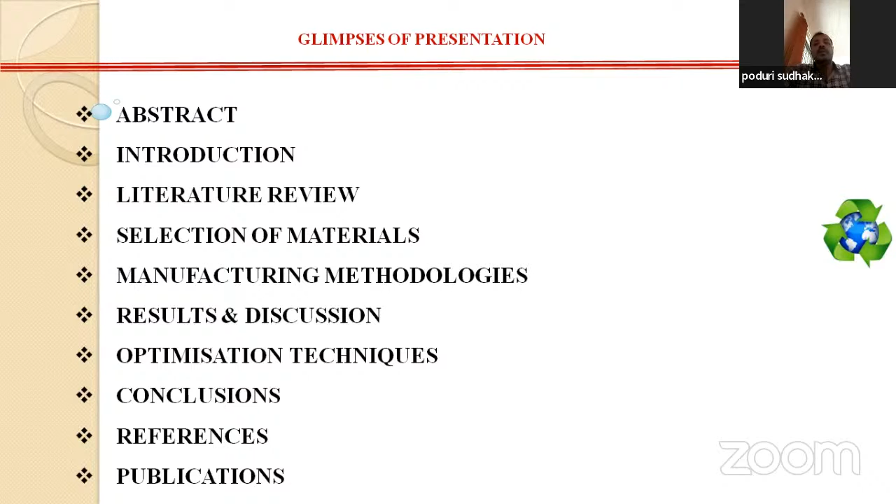So, coming to functionally graded materials: these are an advanced engineering material that is able to survive in very extensive working conditions, whether high temperature, low temperature, a combination or cyclic temperature, or fatigue stress or cyclic stresses. Without change in the metal properties despite n number of stresses and n number of strains, it will have a service life. That is why it is an extensive material, applied in aeronautical as well as present ongoing research for automobile applications.

And these are considered to be heterogeneous. Why? Because in the same material we have the base material as one compound and the reinforcement, just like a metal matrix composite. But in the metal matrix composite, you have a uniform dispersion of the materials. So even though metal matrix composites are considered heterogeneous, if you take any point in the product, we will have the same metal properties.

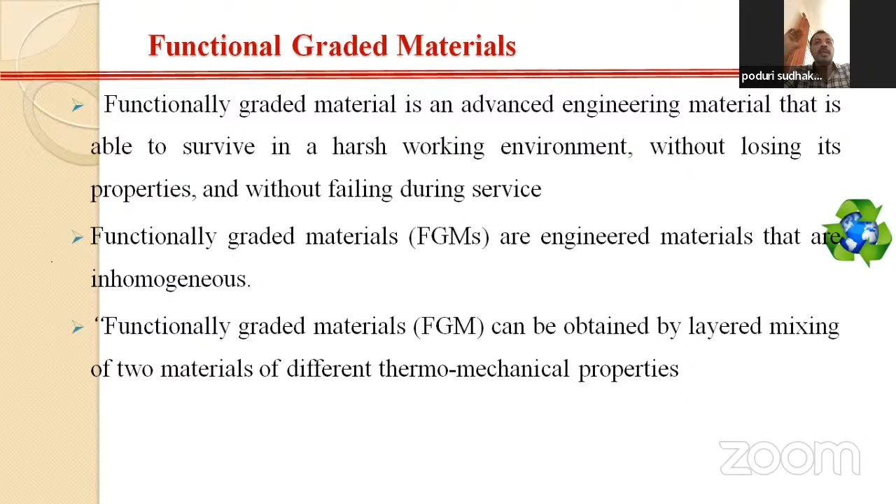But in the functionally graded material, as we proceed from the bottom layer to the top layer, or top layer to bottom layer, there will be a progressive change in the metal properties—either increase or decrease of compression strength, increase or decrease of tensile strength. This means we are able to vary our properties at any point of our metal composition, and that's why these are an advanced material.

So this is not a new metal we are using, it is available in nature. Just like wood, our teeth, and different kinds of muscles, we have these functionally graded materials. But this research has not been done extensively. We are mainly focusing on alloys and composites: metal matrix composites, polymer reinforced composites, glass reinforcement composites, and all other types. But this kind of research is important, where we can have extensive properties.

So why is it called the metallic phase? Basically the matrix metal is treated as the base metal. Metals will take just like aluminum and aluminum alloys, copper alloys, tungsten alloys, vanadium, nickel, carbon, and all kinds of metals we can take in the metallic phase.

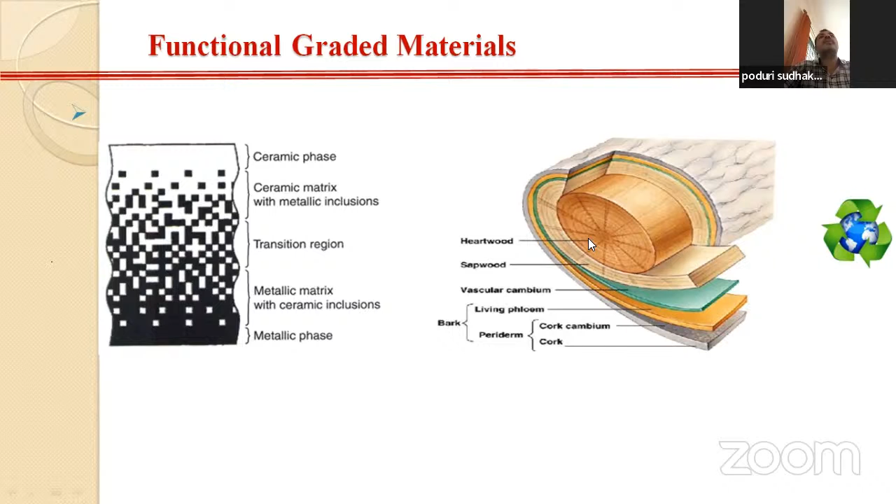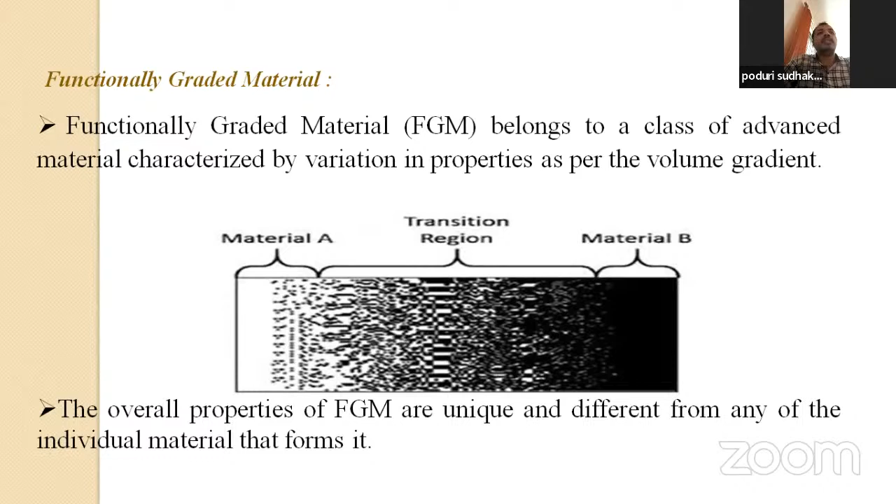Other examples include bones and teeth. If you take the first one, this is the composites. If you take a polymer composite or a metal matrix composite, there will be a uniform distribution of the metal properties. But when you take a functionally graded material, it will have a rise or a lowering of the metal properties as you proceed from bottom to top or top to bottom.

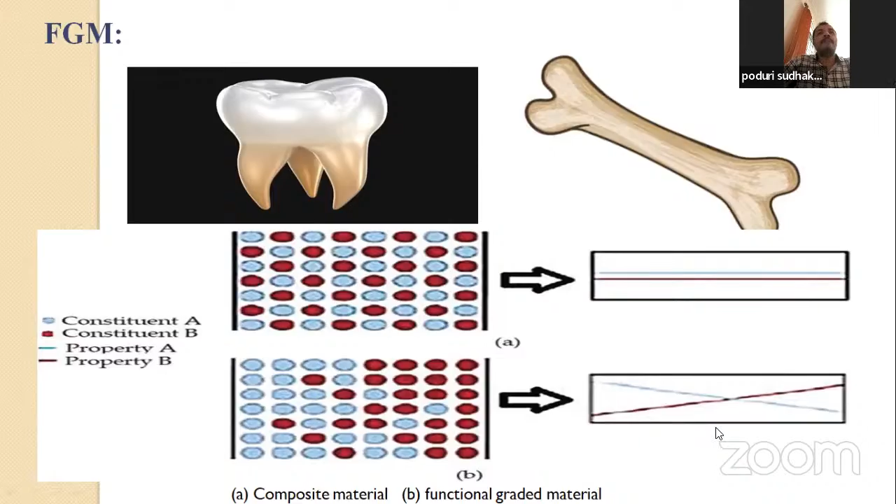From that time on, they have been extensively researching these kinds of products, mainly for the aerospace and aircraft industries, and developed these materials. Later, we are now switching into microprocessors, automobile applications, and domestic applications.

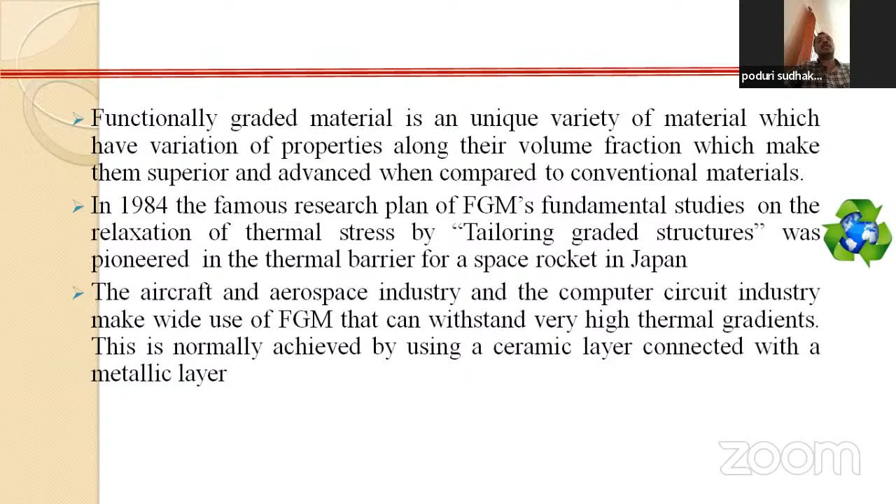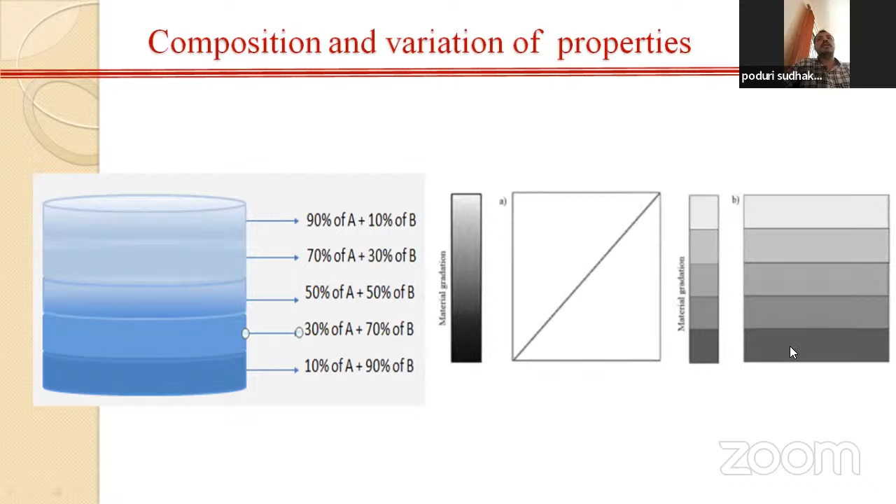This is also in terms of weight proportions. From the bottom, we have 100% of the matrix material, and as we proceed upward, we have 10% reinforcement and 90% matrix material, continuing forward and upward until we have 100% reinforcement. This is the graph showing the material gradation, that is the material composition, and side B, that is the composite material.

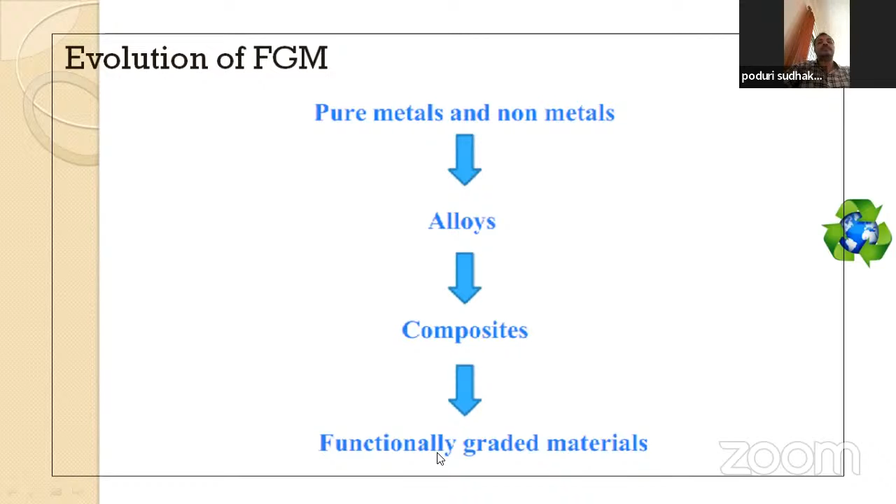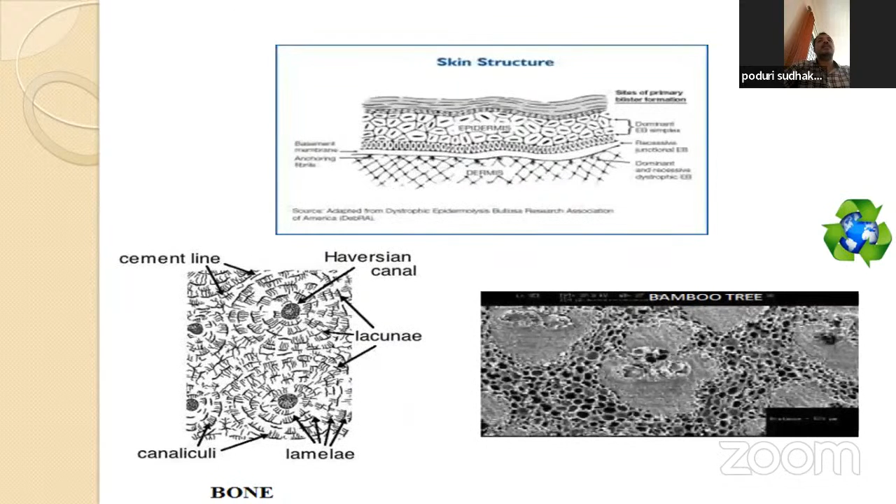So this is the literature review, and I have taken the latest one, 2019. Saleh and Ahmed have done research on functionally graded tubes, of which aluminum is taken as the matrix material and alumina is taken as the reinforcement. They generated these using centrifugal casting for automotive applications. This was published in Metallurgical and Materials International.

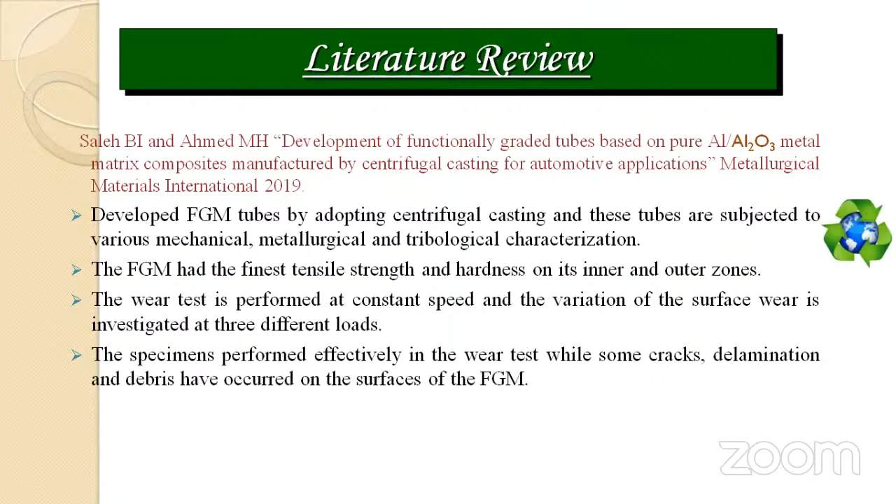Metallurgical and Materials International 2019. And here, why he has chosen centrifugal casting: centrifugal casting is a widely used process in preparation of alloy materials, where we can cast a product by using centrifugal force, and the tubes are produced. He has checked the tensile strength and hardness at the inner and outer zones, and also

found out the wear by using the tribological wear test apparatus, and found the surface wear at three different loads, mainly 5 newtons, 10 newtons, and 15 newtons. Due to the microstructural characterization, he has seen visualization of some cracks, delamination, and some kinds of deformities.

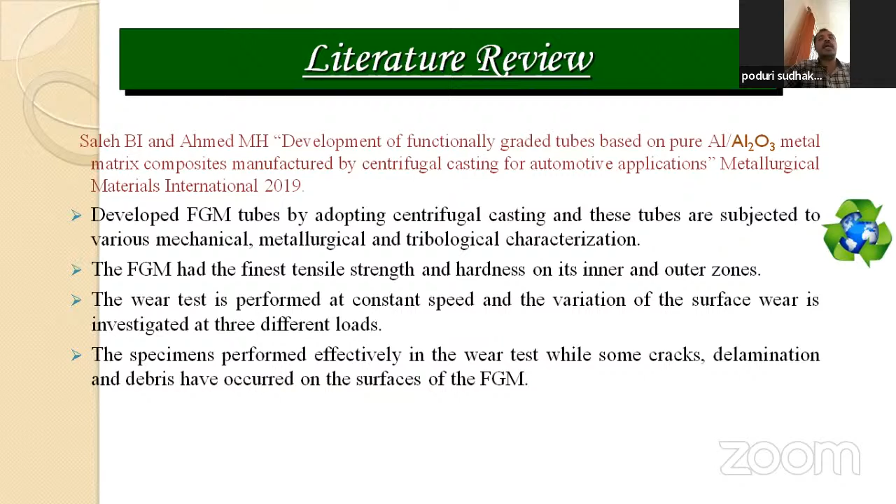But in this research, by taking the centrifugal casting, there should be a gradation of the metal properties. And there is a research gap of how there could be a gradation of the metal properties when we move layer wise, or there is no significant visualization of the matrix and the reinforcement, whether they are bonded together or not, and the gradation of the metal properties is not exclusively discussed. So these are 2 to 3 research gaps found by analyzing this paper.

And similarly, with magnesium modified hypereutectic functionally graded aluminum composites, even though there is a wear analysis, Jayakumar has taken the base metal as A390, one of the aluminum alloys, and he has taken magnesium. Magnesium is a very brittle material, and it is susceptible to heat also. He has taken magnesium to have a magnesium composite,

with percentages of 2 and 4, and he has checked the wear and microstructure properties, and he said that wear properties have been enhanced significantly. Here also he has taken centrifugal casting, but the validation of the process is not discussed in an extensive manner.

And also, when you observe the microstructure characterization, there is a larger amount of debris and deformities, and porosity is also not discussed. Porosity plays a vital role in the microstructural characterization. And the EDX and the XRD analysis are also missing.

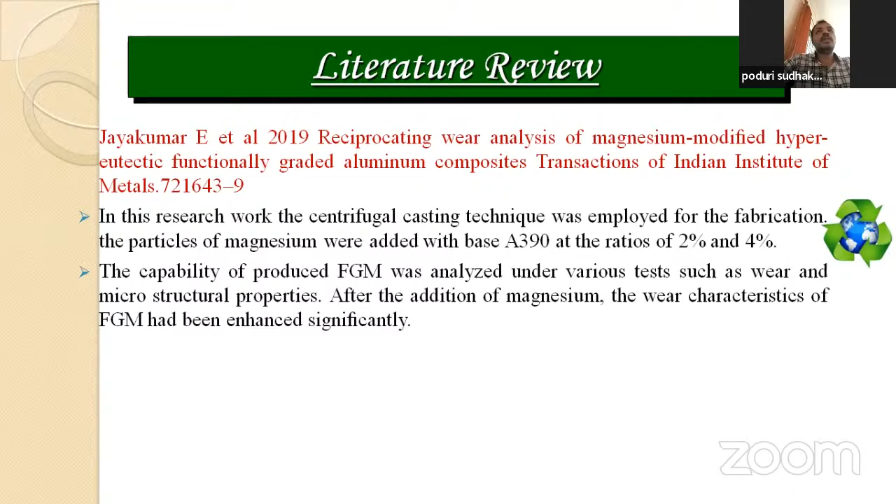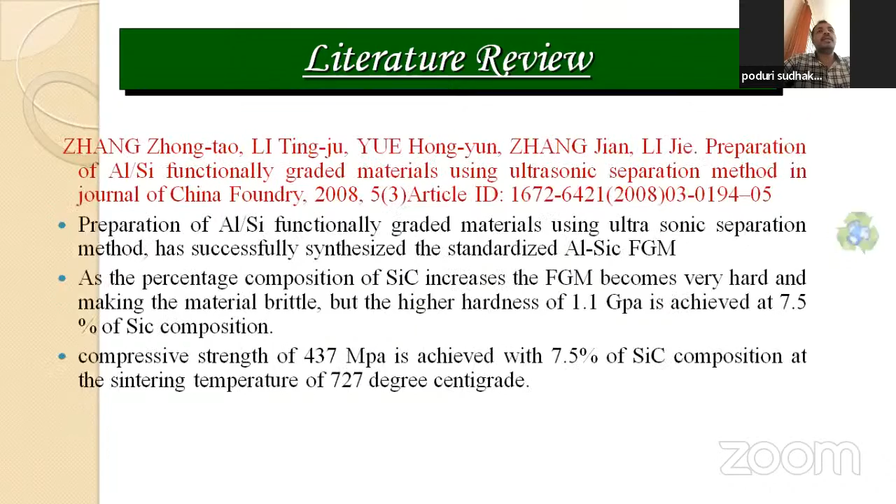So these three process parameters are to be extensively discussed, and they have not been. That is what I found in this literature. And like this, so much research has been done over the past decade. Now, I have also segregated them in terms of whether it is a research paper, a review paper, or just a comparison paper.

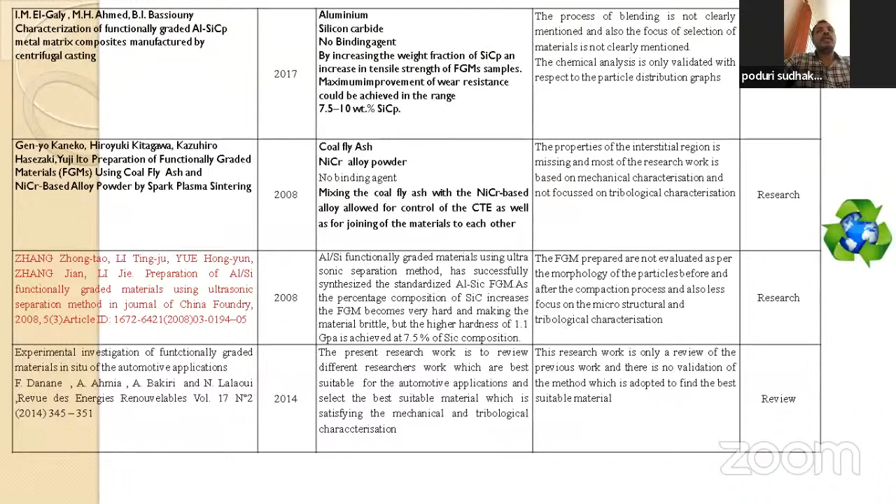So after going through all these, the research gaps I found: even though some researchers have used the powder metallurgy process, the extensive systematic procedure to develop functionally graded materials by powder metallurgy has not been discussed very well, and the process parameters are also not well discussed.

Next, the blending process. The blending process is an important one where we mix the matrix and the reinforcement, and it is not done as per ASTM, the American Society for Testing and Materials, which has specified standards. We need to mix the materials as per the rule of mixtures, and by using the ball milling operation we need to blend our materials to the required proportion. That is also not well discussed in the previous research.

And the compaction and ejection process in powder metallurgy is done in the CTM, the compression testing machine, which we use for the compaction process. Here the loading conditions, the compaction load and ejection load: in the previous research they simply said the material is produced, but how much load is applied, for how much time, what is the dwell time, what is the ejection process, and what are the process parameters, they need to be optimized.

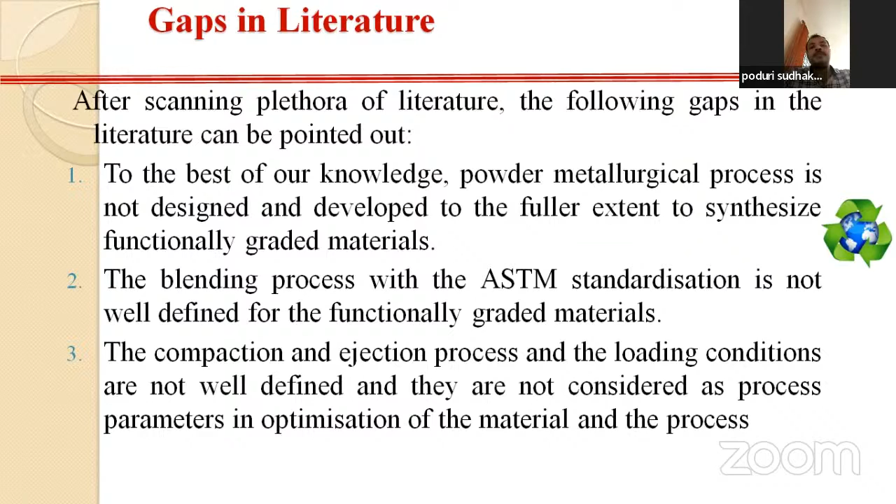And also I have gone through other conditions such as the sintering temperature and the sintering time, the inert gas impingement, and the mechanical characterization with respect to the microhardness, and the interstitial range and discussion.

The SEM analysis is also missing in some of the research work, and most of the research work is done just like a metal matrix composite, but FGM will have a layer-wise deposition. Layer-wise deposition of the matrix and the reinforcement is to be extensively visualized. Only then can any person who wants to do research on functionally graded material do it and have it validated, right?

If it is not validated, then the research is of no use. It becomes null and void. And optimization parameters are also not very well discussed. And for the simulation of the FGM, they have done a simple experimentation, or a simple analysis just like a cantilever beam or a simply supported beam.

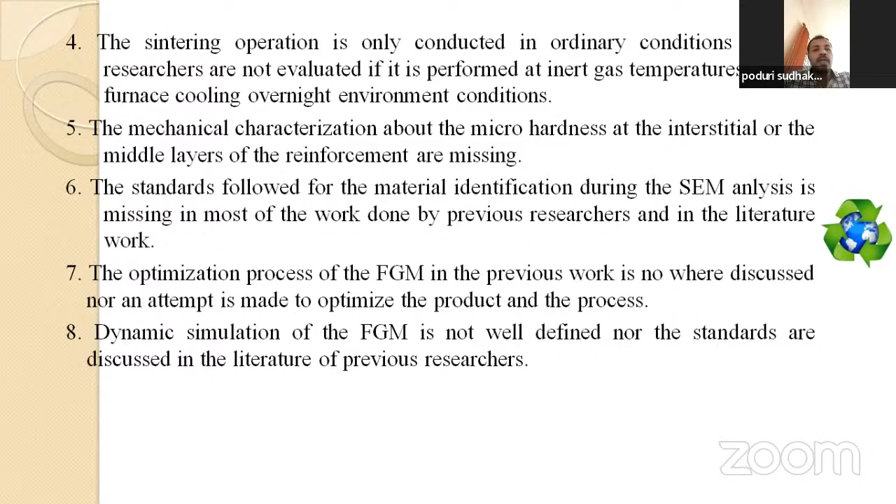But to make a beam of FGM involves more complexity. They have only taken a 2D diagram, but that is not a research-oriented problem. We need to discuss it in depth.

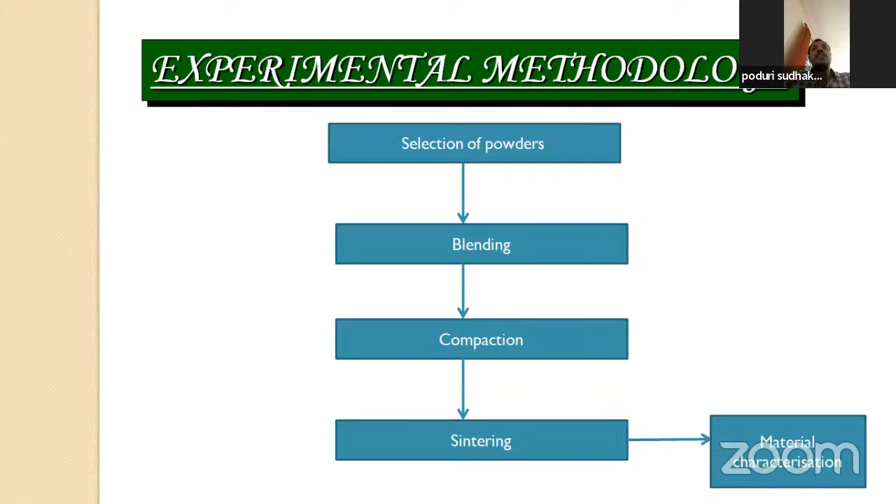So this is my powder metallurgical process, that is the powder selection, blending, compaction, sintering and material characterization. And I have taken a number of matrix materials here, not only pure aluminum but also alloys of aluminum.

Basically I have done research at my doctoral level on aluminum, because aluminum, as everybody knows, is a light metal having high strength, high stiffness, low weight, high thermal conductivity, low wear, and all kinds of superior properties at an economical cost. So that's why I have chosen aluminum as my matrix material in the powdered form.

Why? Because for the powder metallurgical technique it is compulsory; if you take an alloy, we should also convert it into powdered form. So not only pure aluminum, but aluminum 356, aluminum 7075, and aluminum 2024. I have taken all these materials and I have done the research.

So silicon carbide, titanium carbide, magnesium peroxide, and all kinds of ceramics and brittle materials I have considered, and nickel. So to have the electrical conductivity, thermal conductivity, and magnetic conductivity, in order to have all kinds of combined properties, I have taken all these materials.

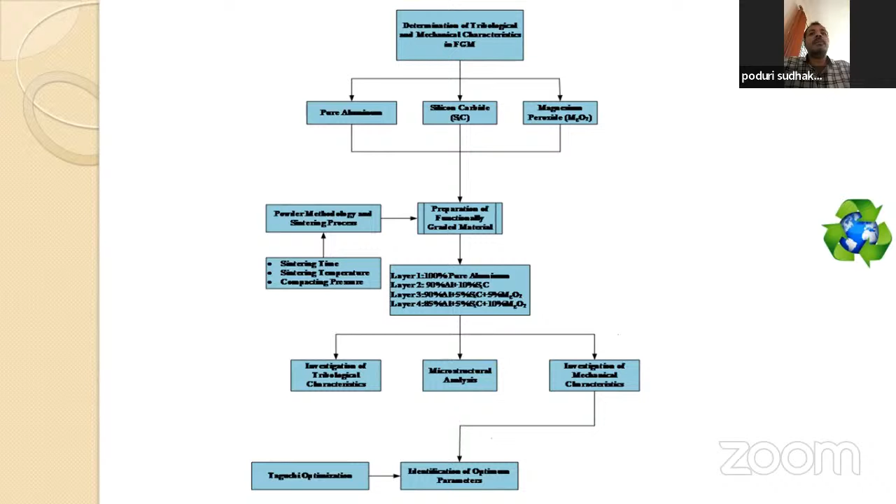As already discussed, I have done not only pure aluminum; I have taken 356, 7075, 2024 and all kinds of alloys. And reinforcements silicon carbide, nickel, copper, titanium nitride, zirconia, magnesium oxide, alumina; all these reinforcements I have considered due to their electrical and thermal conductivities, and also to have high surface finish, microstructure, and tribological properties.

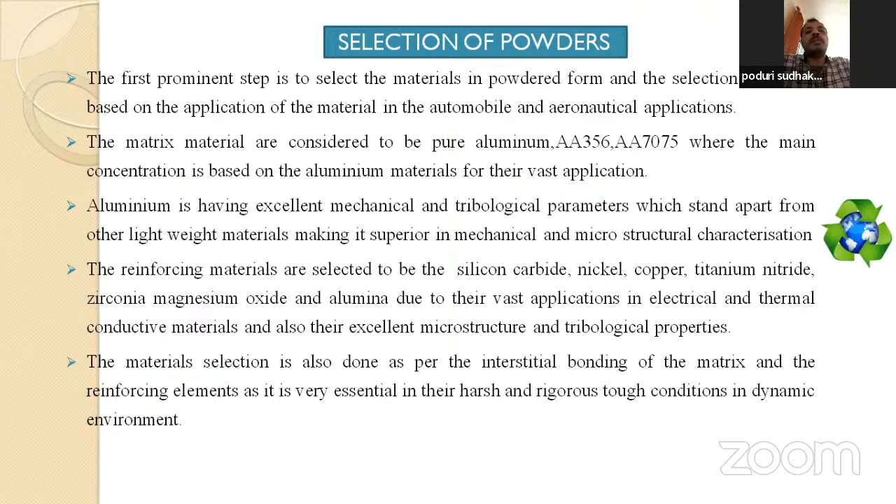We know that pure aluminum has a density of 2.7 grams per centimeter cube, and reinforcement silicon carbide has more than aluminum, 3.21. Magnesium oxide is much more, but it is of a brittle nature. That's why the bonding is low. Nickel has a higher density compared to all these things.

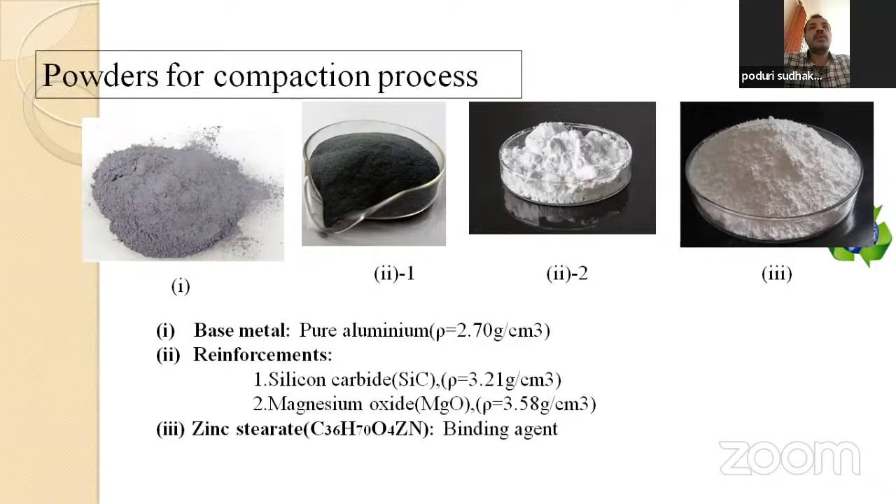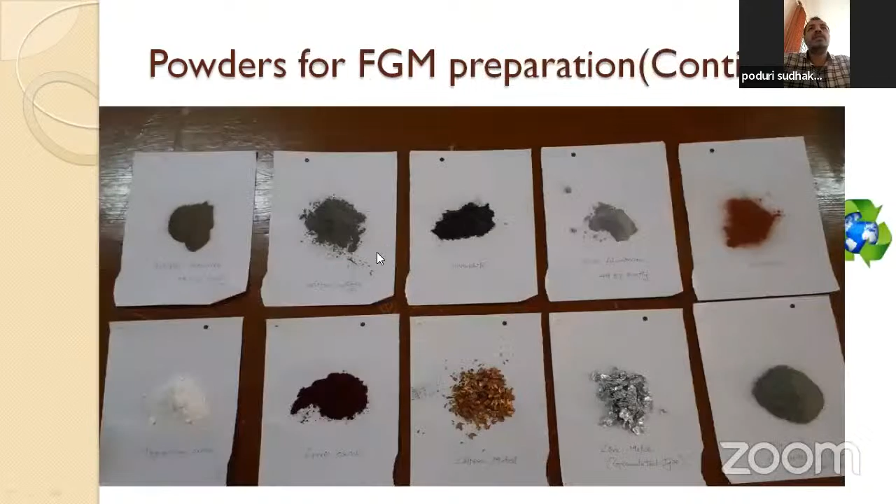Zinc stearate, why I have chosen it, is as a binding agent. A binding agent is one which combines the base metal and reinforcements; it acts like a lubricating agent. If the lubricating agent is not used, and silicon spray is also used in another manner, then there are chances they won't be able to bind, so they are susceptible to break. So these are the powders which I have taken as samples.

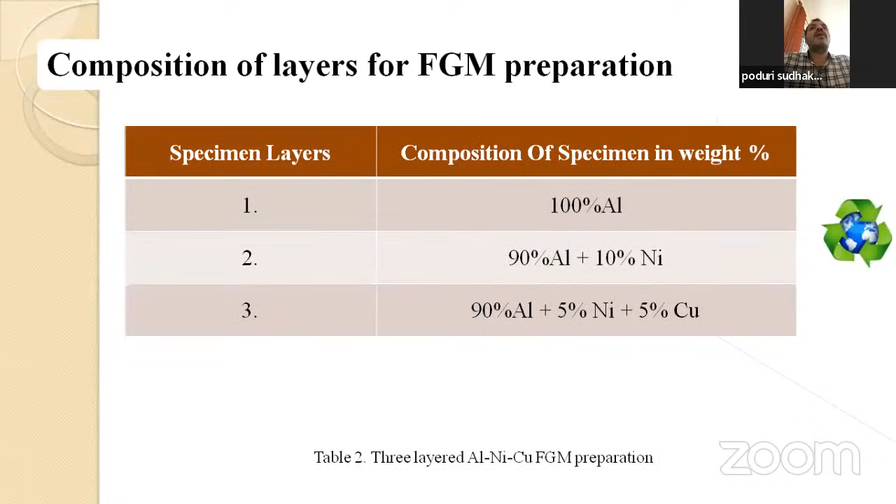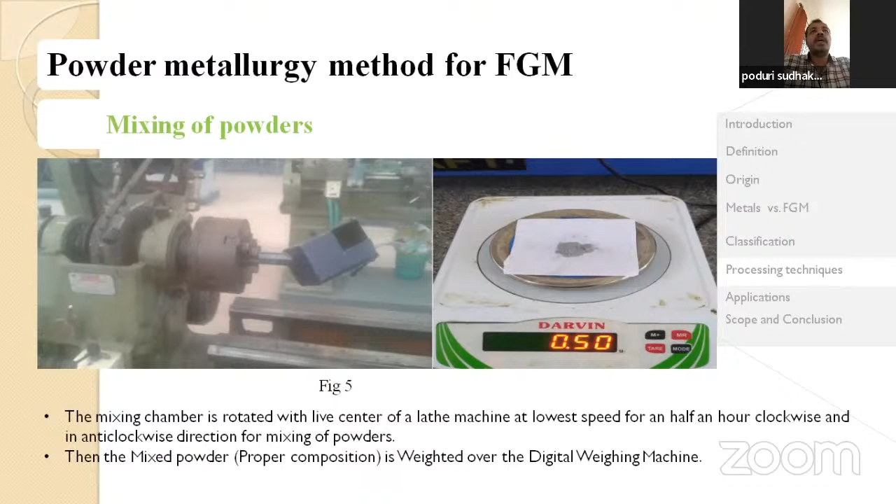So these are the layers, layer wise. This is the starting, without taking the ball mill. I have developed this kind of box which we can put in the lathe chuck, and then we can have uniform mixing and blending of the materials; this is a simple device I have made. Keeping it in the lathe chuck and mixing thoroughly, because these are in powder form, and the materials we produce from the compaction process have very low thickness.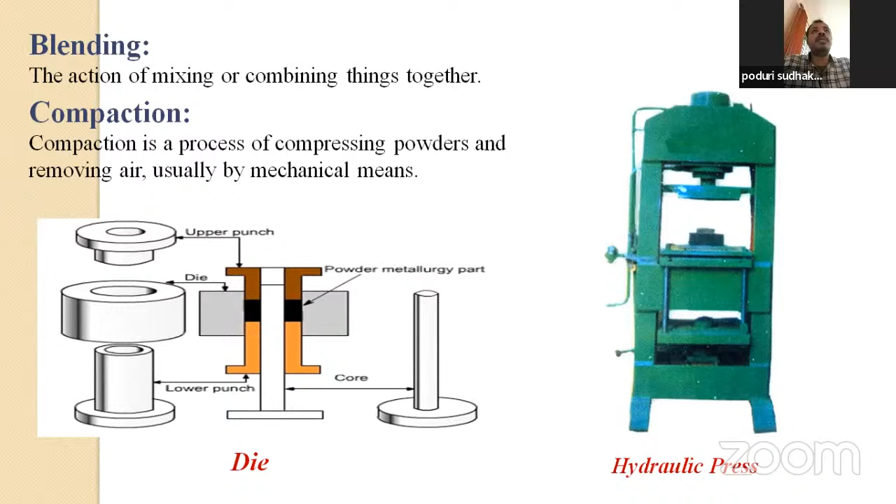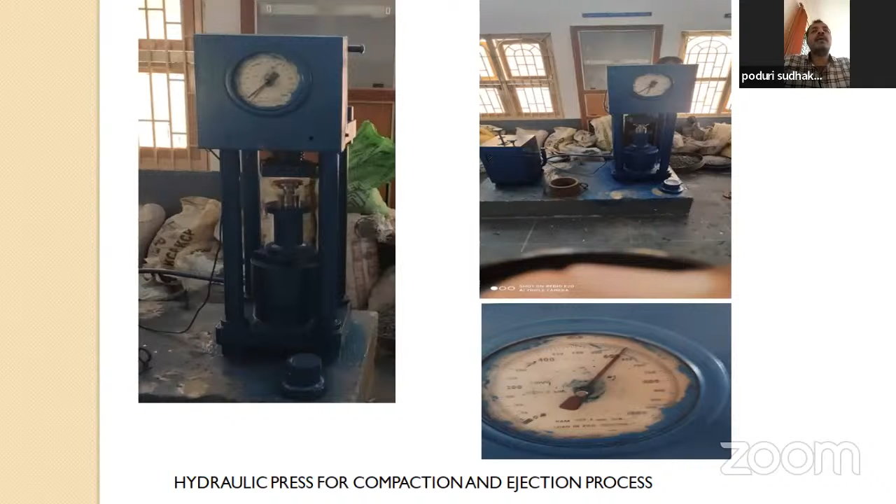The first basic thing I produced has a diameter of 15 mm and height of 13 mm. So very small pieces are produced, because that was the initial time of my research work. And this is a computerized compaction machine where we can have a higher compaction load and lower ejection load. Then these are the dies.

So this is what I have proposed, and I have also given the order for it. I thought of manufacturing it because, to have my own product, I want to design my own compaction die and punch. So that's why this is the drawing I have drawn in AutoCAD.

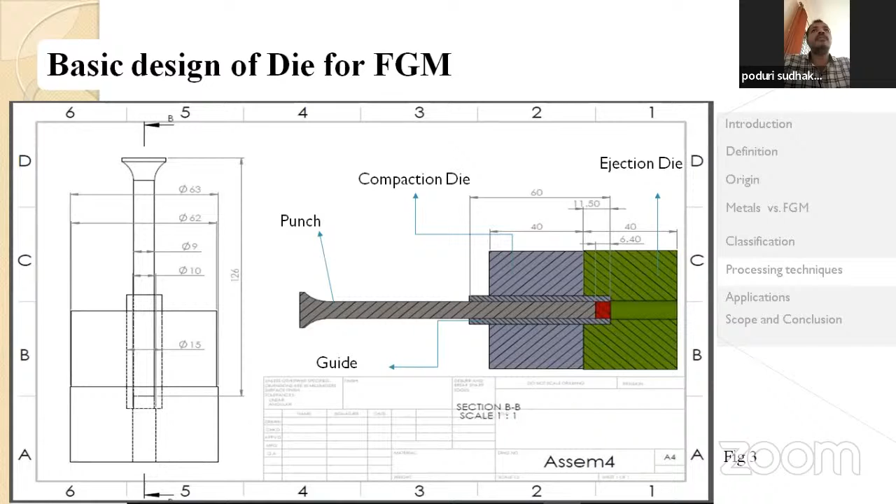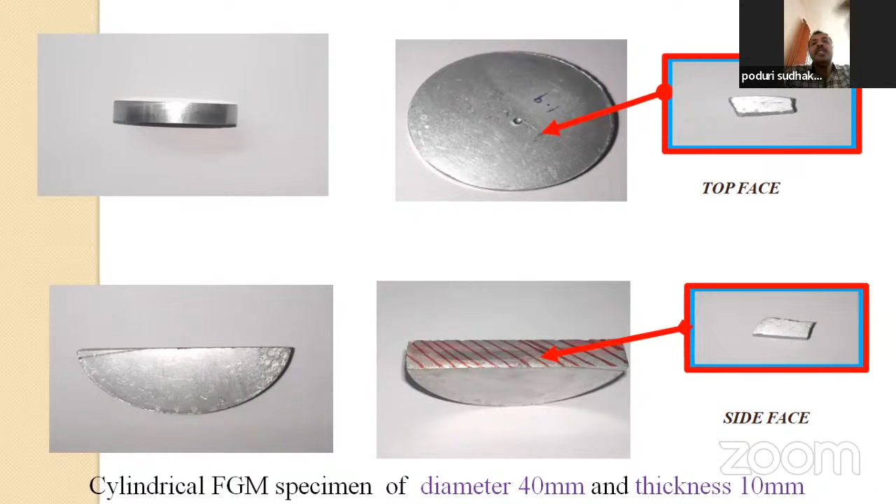So these are the specimens I have produced. These are the cylindrical FGM specimens of diameter 40 mm and thickness 10 mm I have produced. And these are the initial parts. This is the compaction and the ejection die. So this is nothing but the piston parts, sleeve and piston rods, also used for the compaction of the material.

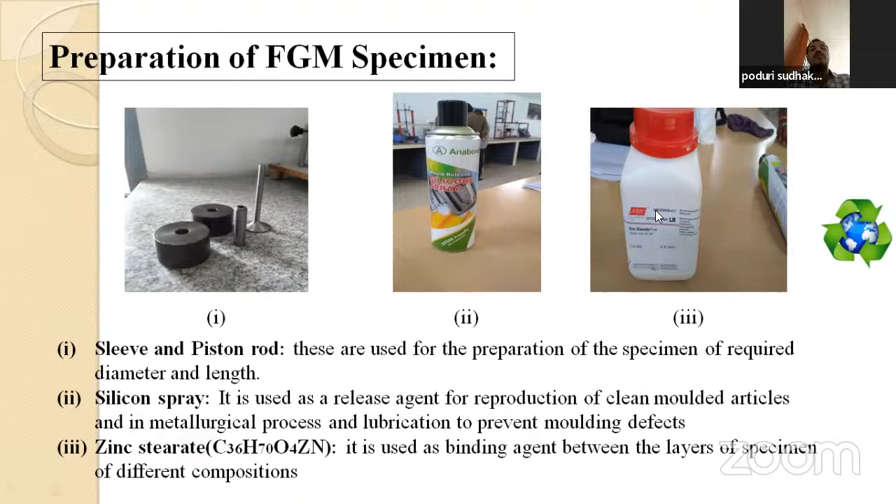And this Anabond, that is nothing but silicon spray, is used as a lubricant agent. Zinc stearate is also mixed with the materials to have non-breakage of the material, to have less damage of it. These are also the specimens I have produced.

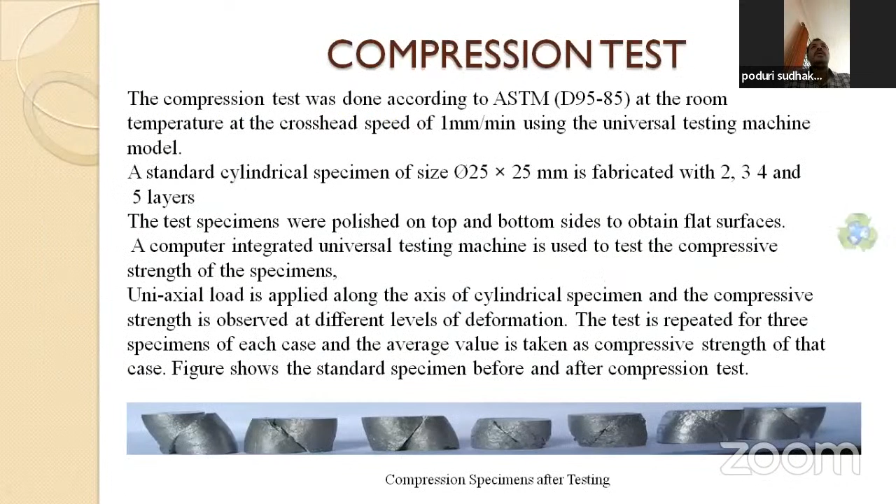And this is the compression testing machine. So this is the characterization process I have done. This is the sintering furnace. This is a tubular furnace.

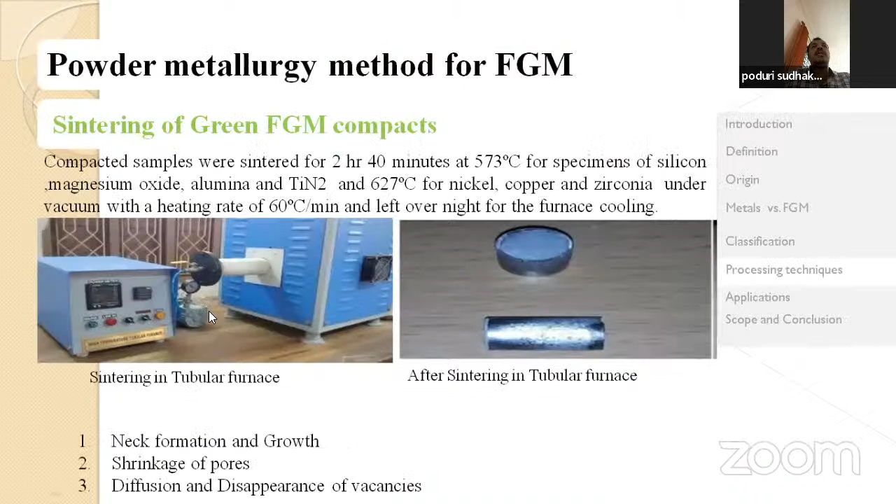So upon this, I have seen that with aluminum and copper, when the compression strength of aluminum is generally 70 megapascals, it has been raised to double the amount. We are having nearly 140 megapascals. And similarly, we can go for 3 times by using the silicon carbide and the magnesium oxide. So this is by the compression testing machine.

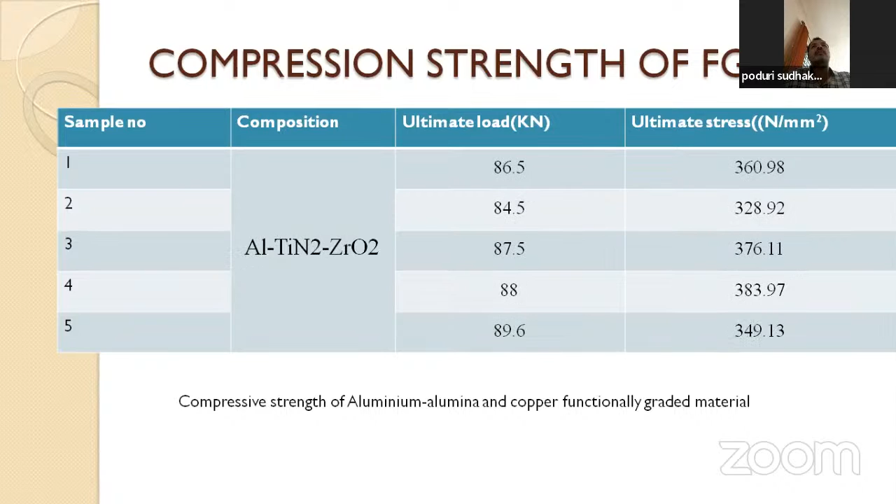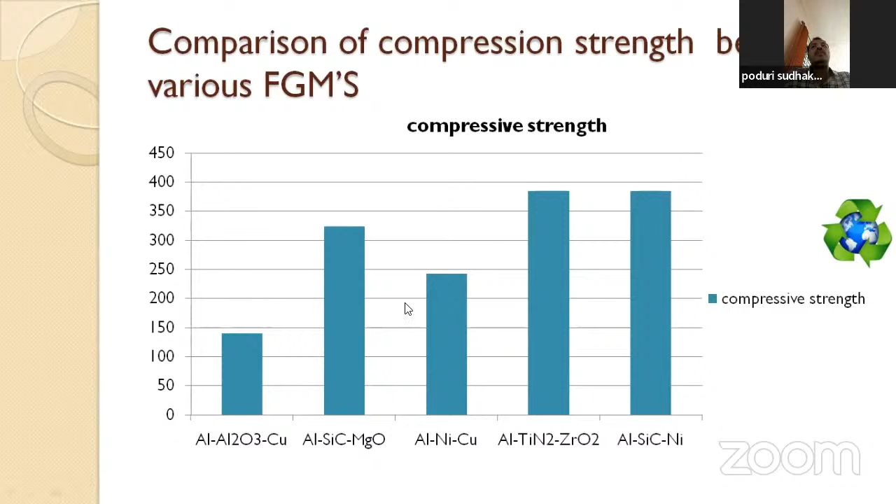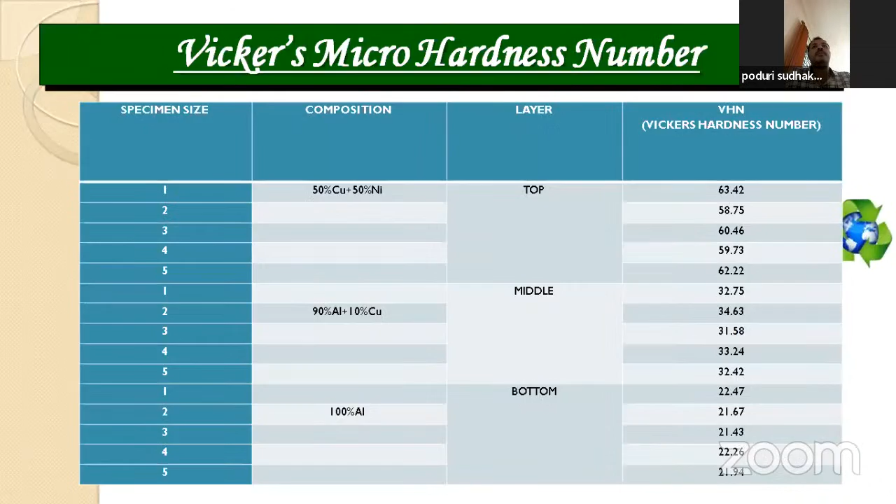So I found out these are the different ones. Of the aluminum, silicon carbide, magnesium oxide combination, I am achieving the maximum one, and afterwards aluminum, titanium nitride, and zirconia is also achieving the highest compression strength. So this is a Vickers hardness test. The Vickers hardness test is also performing at a higher number. And this is also my research work, and this is also the hardness value.

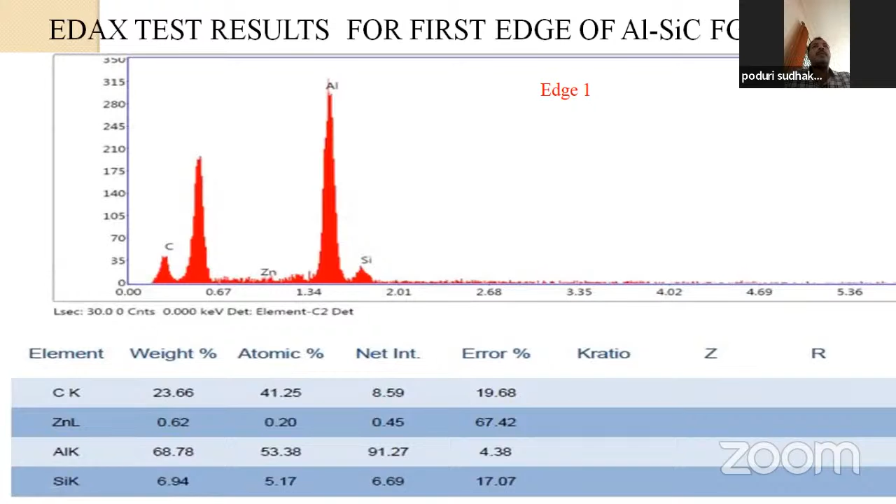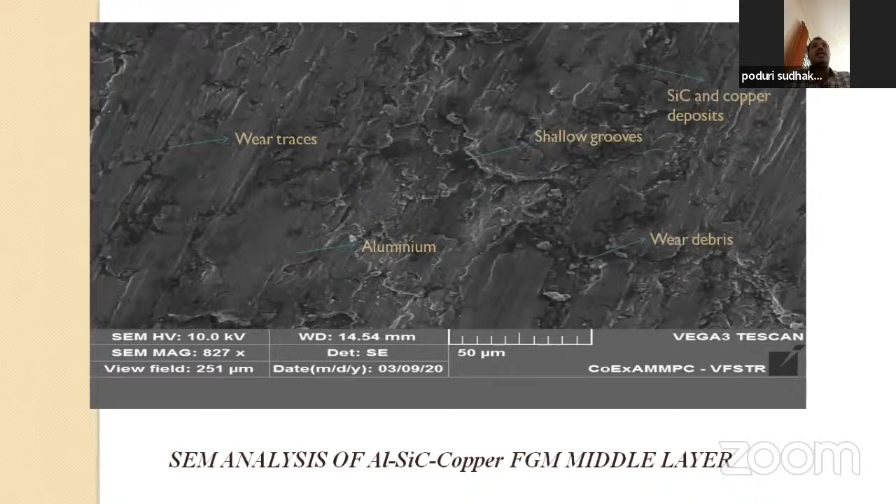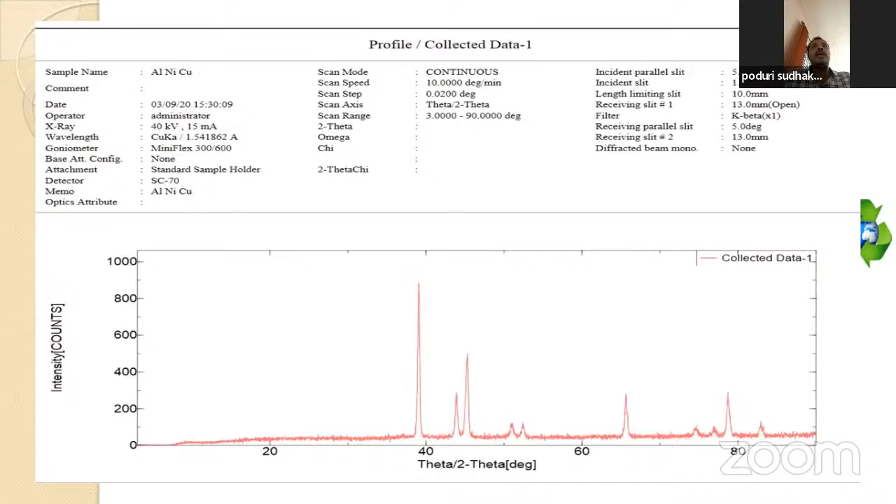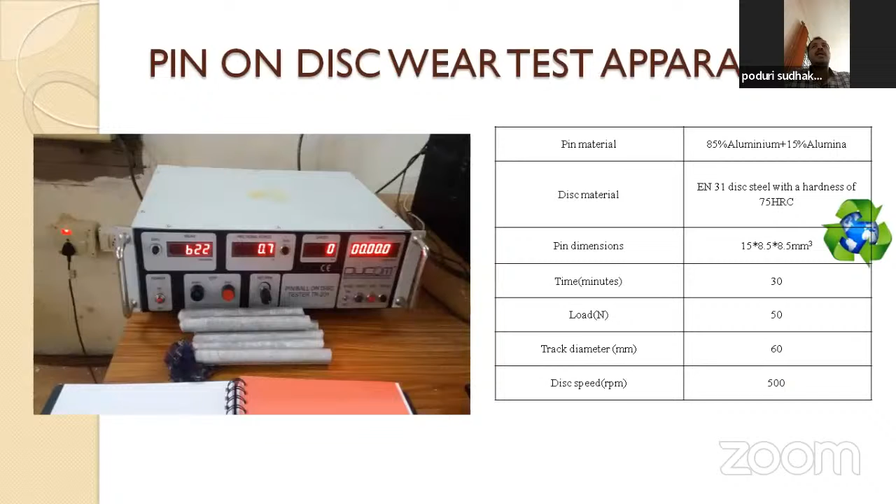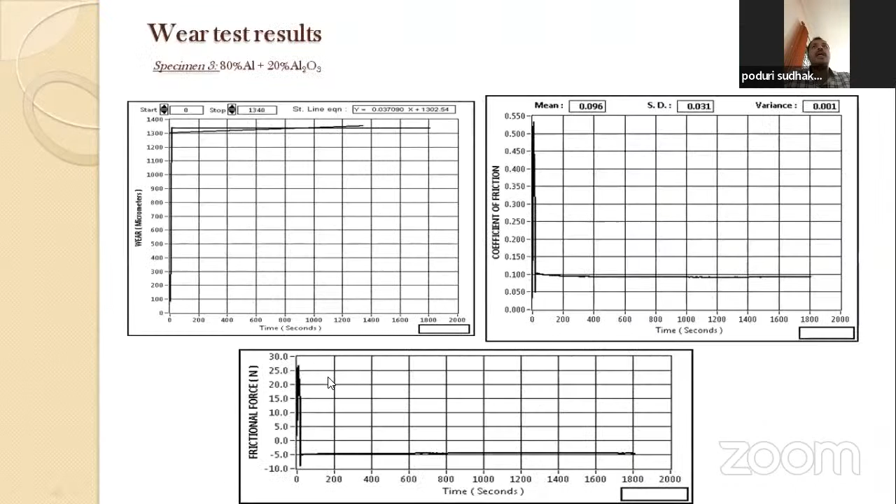So these are the tribological properties I have measured in the tribometer. So like this, I have done various kinds of research. These are the graphs produced: frictional force, wear, and also wear rate, and these are the coefficient of friction graphs. And so all other things I have done.